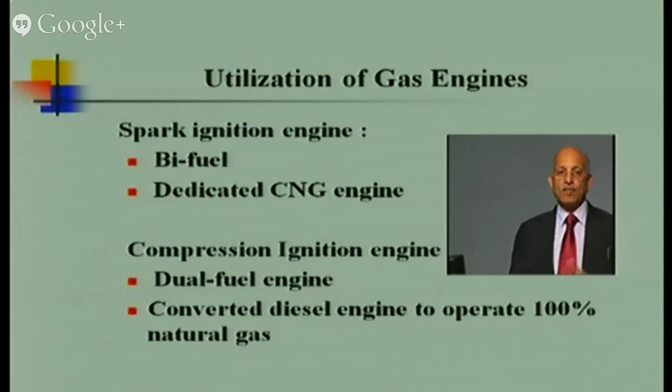A small amount of diesel, say in the 20% or 30% range, acts as a pilot. When this is injected into the combustion chamber, there will be two types of burning: one is called diffusive burning, another is homogeneous burning. In the diesel engine in dual fuel mode, first the diesel will ignite wherever it finds the air, and then that burning will further burn the fuel inside, so in dual fuel you will have diffusive burning as well as homogeneous burning. Next is a converted diesel engine to operate on 100% natural gas.

Any diesel engine, as you know, we have Kirloskar diesel engines, we have Tata and all these engines. They are 4-stroke water cooled or air cooled engines. These can be converted to 100% gas engines. What it means is that once we have a gas mechanism, we have to make certain changes.

The main changes are, first of all, we need a gas carburetor. Like a petrol carburetor gives a 1:14.5 ratio, approximately 15. Similarly, depending on the gas, whether it is natural gas, biogas, or producer gas, every gas has an air fuel ratio. So the gas carburetor will give the air in the correct air fuel ratio. So we need a gas mixing device.

Now, there are certain fuels; you can utilize your gases. You can utilize LPG. LPG is a mixture of propane and butane, and all these gases can be utilized in the dual fuel mode as well as in the 100% mode, in spark ignition as well as compression ignition. Any of it can be used.

Petrol and diesel calorific values are given, and you can see natural gas or biogas have a high ignition temperature, so they cannot burn on their own. Hence they require an ignition mechanism. In the dual fuel mode it will be with diesel injection, or in spark ignition mode it will be with the spark. And these are the air fuel ratios given.

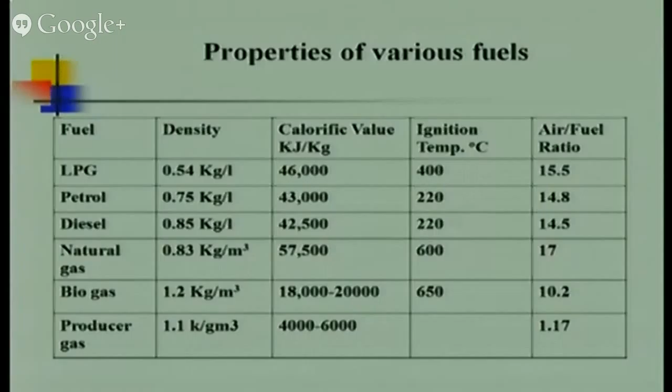These are some compressed natural gas fuel characteristics, where you can see auto ignition. Boiling point is minus 162 degrees centigrade. Air fuel ratio is 17.24, on a weight basis. The volume basis is different and the weight basis is different. Then fuel air mixture quality: it mixes very well.

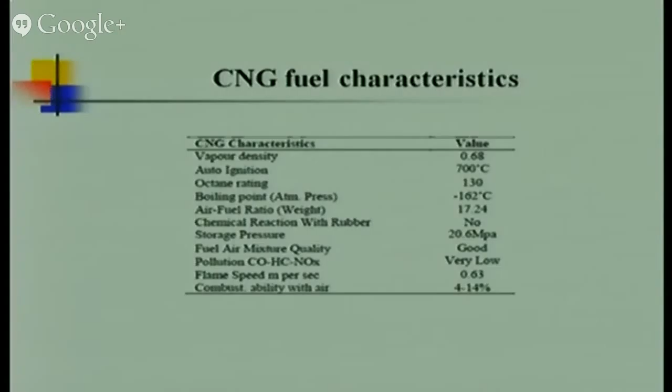Pollution is very less: carbon monoxide, hydrocarbons, NOx. It depends, of course; as you know, NOx is a temperature dependent phenomenon. So we have to see accordingly how the variation of NOx is. And combustion ability with air is very good, between 4 to 14%. If the air is available, it will immediately start burning.

Natural gas is safer than gasoline. How come? Its ignition temperature is higher than gasoline and diesel. It is lighter than air and hence diffuses very fast. LPG does not diffuse very fast. In LPG, it gets stored in pockets. Suppose in the kitchen there is an LPG leak, then it will be stored in the corners, and whenever you start burning, it will burn. But natural gas can diffuse easily into the air.

Diesel and gasoline will pool on the ground, increasing the danger of fire. Once diesel or petrol spills on the ground, it can catch fire and create a problem. CNG or NG doesn't do that. It is non-toxic and will not contaminate groundwater if spilled, while petrol or diesel, whether seaside or otherwise, will do that. It is a cleaner fuel as far as emissions are concerned and an environmentally clean alternative.

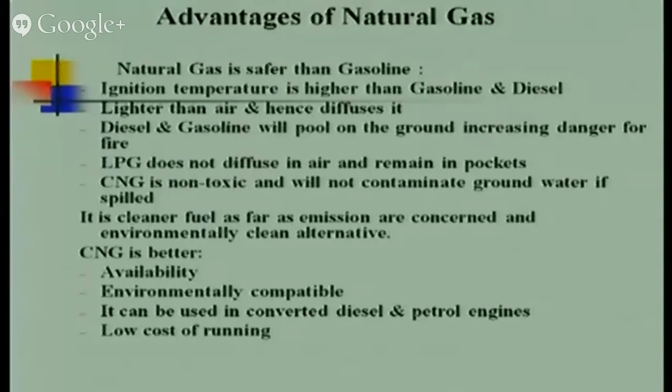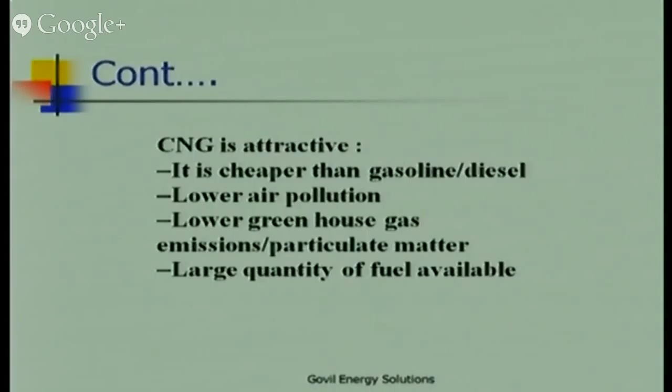Environmental compatibility is there. It can be used in converted diesel and petrol engines, and the cost of running is low. That's why people are getting their vehicles converted to the gaseous mode. It is attractive because it is cheaper than gasoline, low air pollution, lower greenhouse gas, and a large quantity of fuel is available.

But definitely there are certain disadvantages also. The vehicle range: you can fill the cylinders and run to a certain miles. Of course, the same is true with petrol also, but petrol or diesel is available in every state and at all the petrol pumps, which is not the case with natural gas. But soon you will find a day when biogas is purified and converted into bio-CNG and made available. In foreign countries it is there. I hope soon it will be seen in India also.

Fuel storage: because the gas is compressed to 200 bar pressure, you need cylinders for that, which makes the vehicle heavy, and that is a problem. Then infrastructure cost and sufficient supply: as we have petrol pumps, we should have CNG pumps also. In Delhi it is there, or maybe some other places also. So for that you need to make an infrastructure.

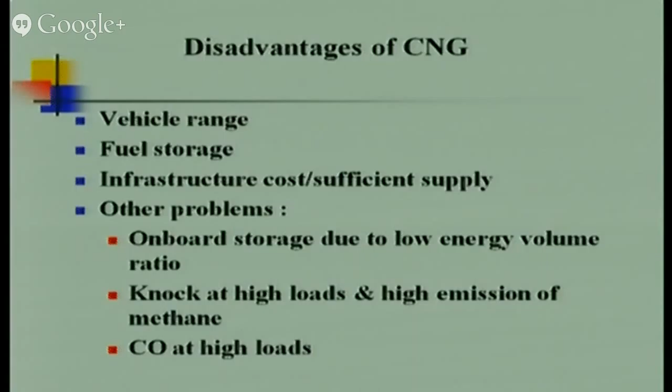Then on-board storage, due to the low energy-to-volume ratio. It knocks at high loads; we have to take care of that knocking. And carbon monoxide at higher load levels in natural gas. So these are certain disadvantages. Otherwise, it's a cleaner fuel, it is a cheaper fuel, it is easily maneuverable. Absolutely no problems.

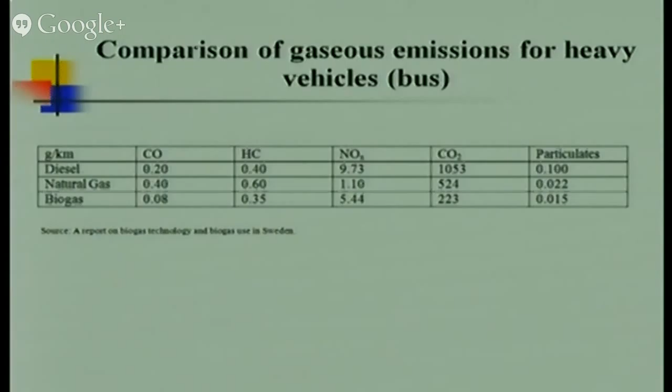This is just a table showing the emission levels. For diesel, you can see carbon monoxide 0.20 grams per kilometer, hydrocarbon 0.4, NOx 9.73, carbon dioxide 1053, and particulate matter 0.10. With natural gas, CO is slightly higher, 0.4, hydrocarbons are there, but the NOx level is lower than diesel. Similarly, carbon dioxide is lower.

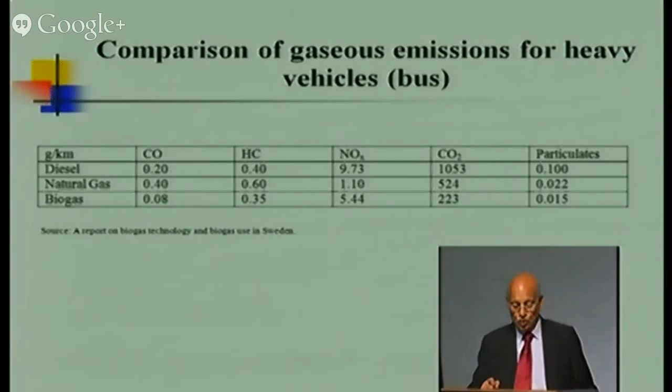Biogas is still lower: CO 0.08, hydrocarbon 0.35, NOx 5.44, carbon dioxide 223. These are some typical figures taken from certain data. They can vary slightly, but not much. It is indicative.

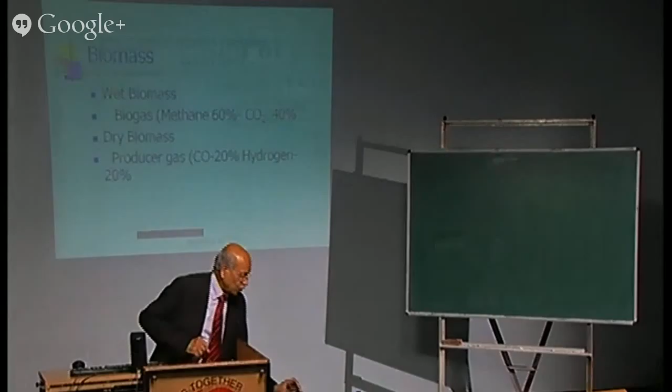Then we have biomass, which could be of two types: wet biomass and dry biomass. From wet biomass we can get biogas, that is methane 60%, carbon dioxide 40%, with hydrogen sulfide and other traces. Any organic material like cow dung, human excreta, food waste, industrial waste can be converted to biogas. The plants, the technique and the technology are there, and that biogas can be purified, compressed, filled into cylinders, and used in the automobile industry as well as stationary applications.

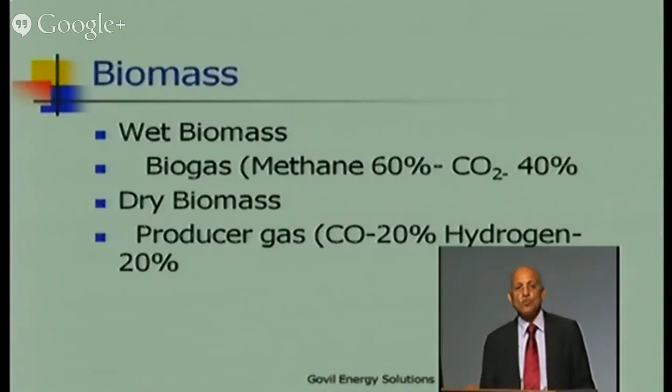For dry biomass, we have gasifiers. We can produce producer gas, which gives carbon monoxide and hydrogen of the order of 20%, 20%. That is possible from wood, coal, sticks and other materials, and all these gases can be utilized for running engines in either of these modes.

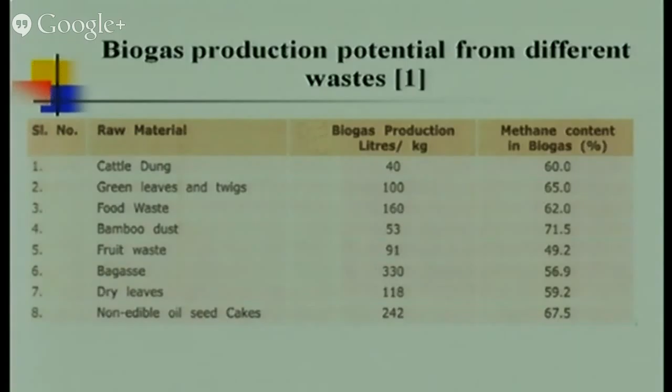It is just a table which will tell you how much waste we are having and how much we can convert. From the cattle dung, I have written 40 liters, which means 25 kg of cow dung. In terms of meter cube, 25 kg of cow dung can give you 1 meter cube of gas in 24 hours, provided you maintain a temperature inside the chamber, best at 38 degrees centigrade, because this is in the thermophilic and mesophilic region. In this case we can convert 25 kg to 1 meter cube of gas.

Similarly, from green waste and food waste, around 12.5 kg to 15 kg can convert to 1 meter cube of gas. Bamboo dust, fruit waste, bagasse (cane sugar waste), dry leaves, non-edible oils, oil seed cakes, and jatropha are also sources. From jatropha we take out biodiesel, and that waste can be utilized for generation of biogas.

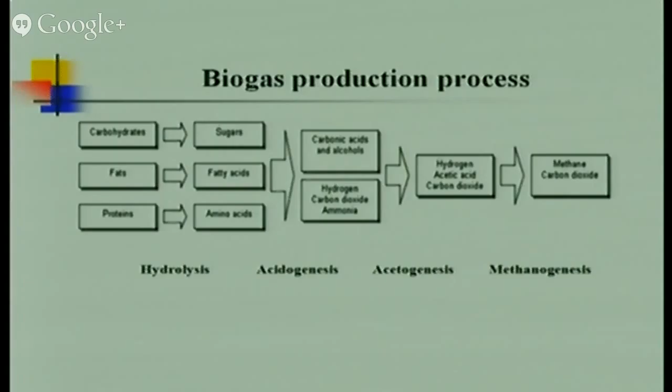This is the biogas production process, where carbohydrates, fats, and proteins undergo a hydrolysis process that converts them to sugars, fatty acids, and amino acids - acidogens. First there is hydrolysis: the raw material is mixed with water. Once mixed, hydrolysis occurs, then acids are formed - carbonic acid, hydrogen, carbon dioxide, and ammonia are formed in the acidogenesis process, and after that is the methanogen process. So these are the four processes by which biogas is produced: first hydrolysis, then acid formation, then acetogenesis, and then methanogenesis.

Now, once we have the biogas, what are the different processes by which it can be purified? First is absorption into liquid, then adsorption on a solid surface, membrane separation, cryogenic separation, and chemical conversion.

The absorption process is the same as when you drink Coca-Cola - once you open it, there's a gas, that's nothing but carbon dioxide, meaning the water gets dissolved with carbon dioxide. In the same way, in this process, water and biogas are used at higher pressure, approximately 10 bar pressure. The gas is compressed to 10 bar pressure, and the water is also pressurized to 10 bar. The gas is passed from the bottom, and water is fed to the top, so there's intermixing in the tower, and you can get purified biogas to the extent of 95%. Methane coming in at 60%, biogas at approximately 55 to 60%, comes out purified at the order of 95%.

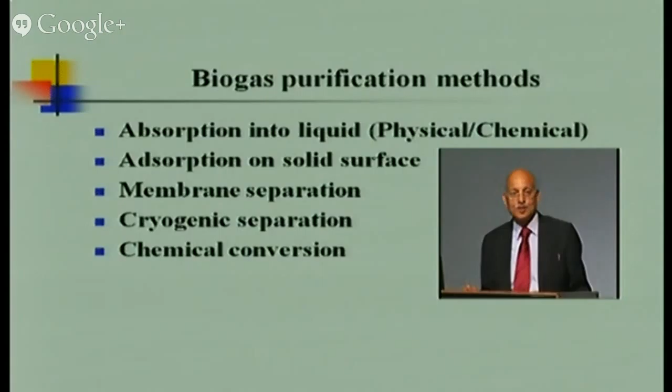The other processes are costly: membrane separation, cryogenic separation, and chemical conversion. They are a bit costly, but membranes are available through which the gas is passed to get it purified. Cryogenic involves reducing the temperature, so you have to apply energy to create a cryogenic system, which makes it costly, and then there's chemical conversion.

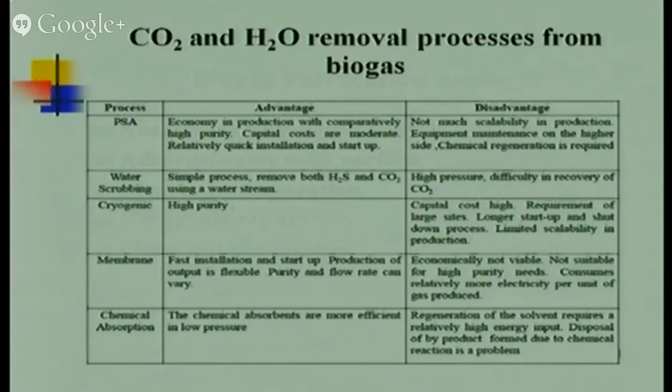This is just in detail. PSA, pressure swing adsorption system, which I just explained to you. It is economical with high purity. Capital costs are moderate, with relatively quick installation and startup.

Not much scalability in production. Equipment maintenance is on the higher side. Chemical regeneration is required. This zeolite, after 5 years of service, is changed. Once that is done, it can be regenerated or it is changed.

Second one is water scrubbing. As I told you, it's a simple process. It removes both hydrogen sulfide and carbon dioxide using a water stream. Water at higher pressure and gas at higher pressure interact, and you get the pure gas. High pressure causes difficulty in recovery of carbon dioxide, because carbon dioxide mixes with water to make carbonic acid.

Either you want to recycle the water, in which case you have to purify it again, which will be a costly affair, or else it is just let to the ground, which will again be a source of pollution. So we have to see it accordingly.

Cryogenics is there, very high purity is there, but capital cost is very high. Requirement of large sites, longer startup and shutdown process. Limited scalability is there.

Membrane also, the rolls are coming from which it is being passed. Fast installation is there, the startup is good, production of output is flexible. Purity and flow rate can vary, but it's not viable, it's really very costly.

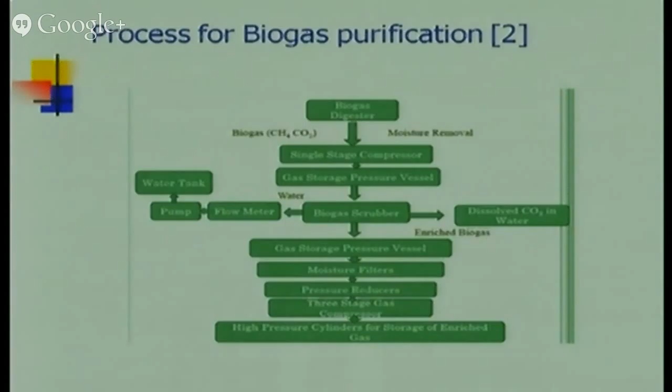Then there's a water tank, we have a pump, then we have a flow meter, and then we are having a biogas scrubber.

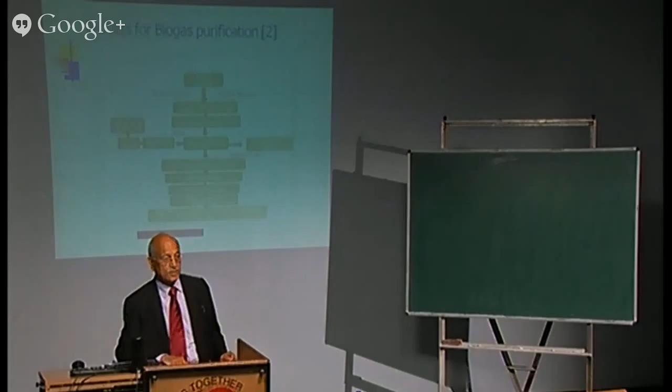Once from the biogas scrubber the dissolved carbon dioxide and water goes out, the gas is stored in the pressure vessel. Then there is a moisture filter, then a pressure reducer, then we have a 3-stage compressor which can increase the pressure to 200 bars, and then it is filled into the gas cylinders, which can be further utilized with your vehicles.

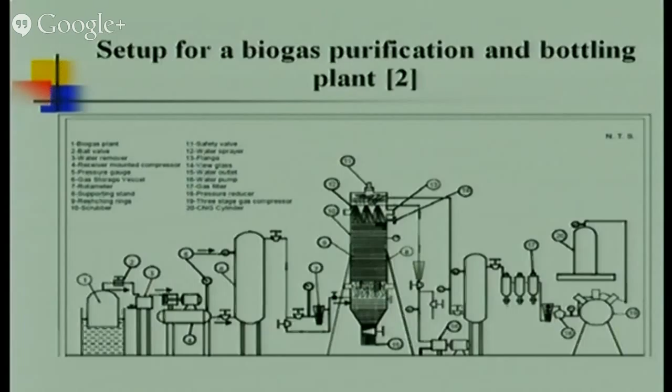...purified, then it is taken to the cylinders. There is a cleaner, the moisture is removed, and on the right side you will find number 19, which is a compressor. This compresses to 200 bar pressure, and then it is filled to the cylinders as required.

You can see the towers as I discussed. The height is more than 4 meters. There is a middle section, a top section, and a bottom section.

The gas is fed from the bottom, water is sprinkled, and we get the gas. We have ceramic materials put in here, which give more interaction with the gases.

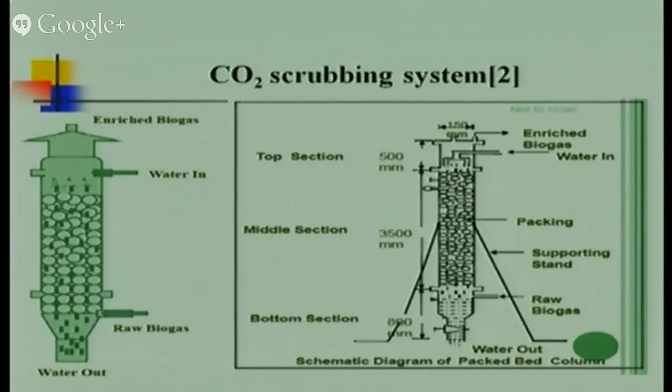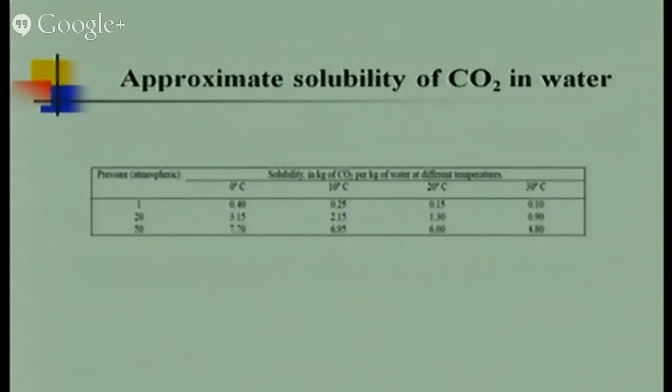Just to tell you, if you increase the pressure of the gas, then there is more dissolution of water and carbon dioxide. More carbon dioxide will be dissolved when you increase the pressure. If you see at pressure 1 bar at 0 degree centigrade, it is 0.40.

But as the temperature increases, the solubility will decrease. So if you increase the pressure, more gas is dissolved, but if you increase the temperature, it is going to decrease.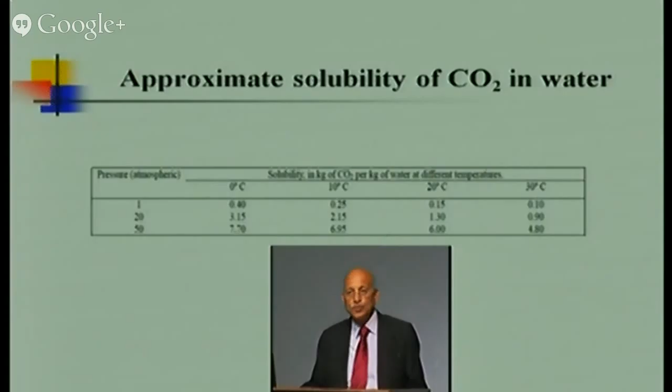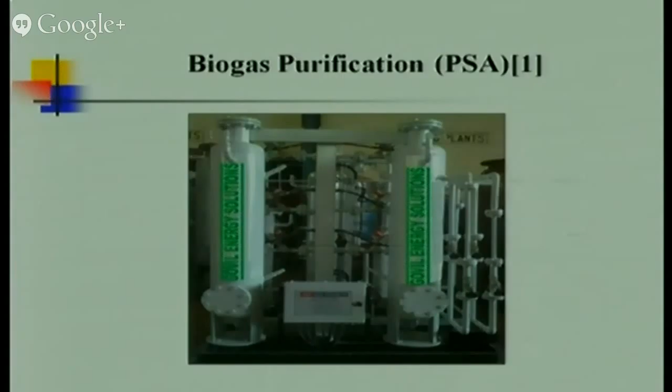This is the PSA system. In this, there are 2 towers. The raw biogas comes into one at a pressure of 7 to 10 bars. Inside the cylinders, there is a zeolite material, zeolite 13, which is an aluminosilicate material having small pores.

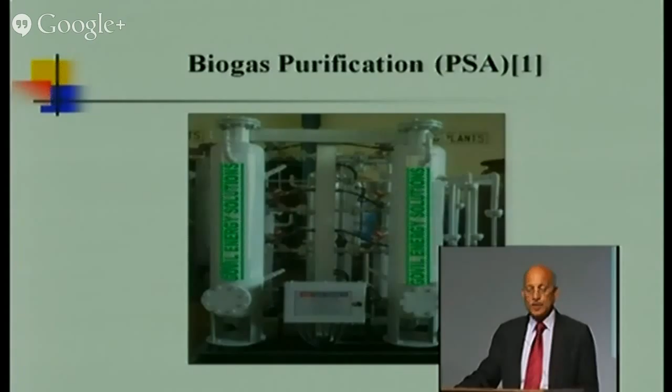The carbon dioxide is absorbed onto the surface, while methane passes from the top. It has an automatic timer mechanism, so one cylinder works for 5 minutes. At that time, methane is let out and carbon dioxide is absorbed onto the zeolite material. After that, in the second cylinder, raw biogas passes, methane is let out, and carbon dioxide is absorbed.

Meanwhile, when methane is being produced and carbon dioxide is being absorbed in one cylinder, the carbon dioxide is being released from the first cylinder. After 5 minutes one cylinder works, then another, then again the first, and so on, and finally you get the methane. One advantage is that you can also store the carbon dioxide.

Once you store this carbon dioxide, you can make it into dry ice. Equipment is available where you can form dry ice, which can be utilized for many purposes. As you know, when we take food onto aircraft, we use dry ice for that. It is a hot cake - it sells like anything.

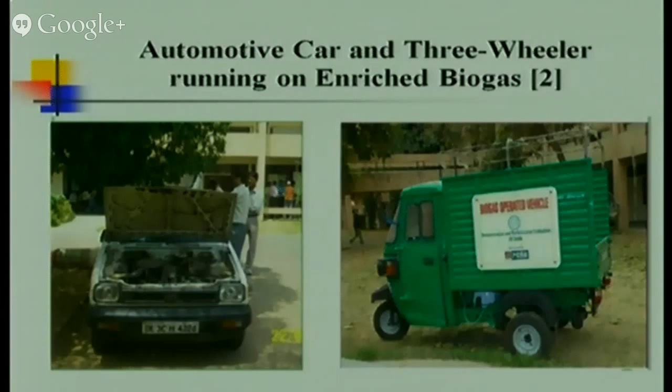At IIT Delhi, in the CRD department, with Dr. V.K. Vijay, they have compressed this and filled it into cylinders, and they are running vehicles there. Also in Delhi, we run CNG buses. So either you can have natural gas from fossil fuels, or biogas converted to CNG used in vehicles - there isn't any real difference, perfectly no problems. The same cylinders are utilized for this.

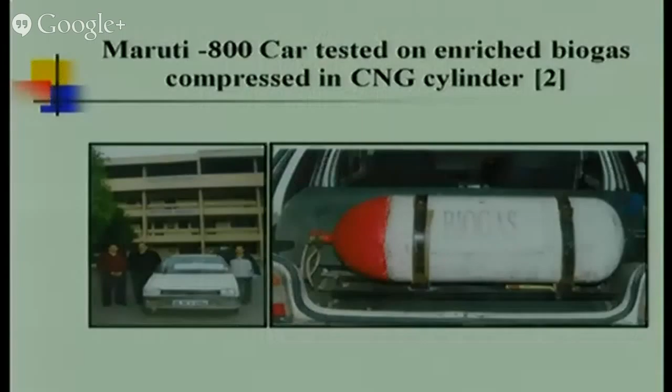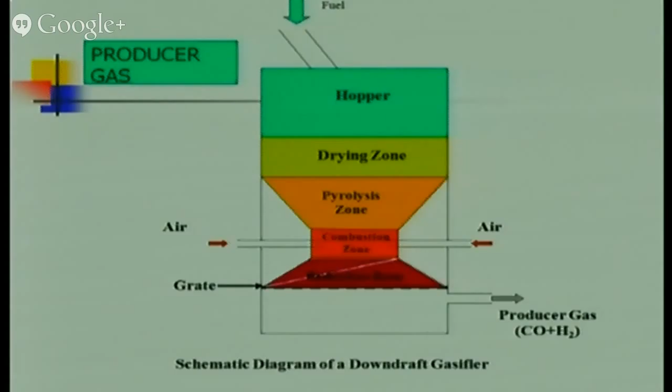This is for the producer gas. This is a downdraft gasifier where there is a hopper, the drying zone, the pyrolysis zone, and the combustion zone. Under controlled combustion, you get producer gas, which has a percentage of carbon monoxide and hydrogen. That can also be utilized either in 100% mode or otherwise.

In the Second World War, there were many vehicles, 80,000 vehicles moving in Sweden, that had this type of mechanism for running on producer gas. But as you know, liquid fuel is easy to carry for longer distances - that's why it is not preferred, for various reasons, but otherwise this can be utilized.

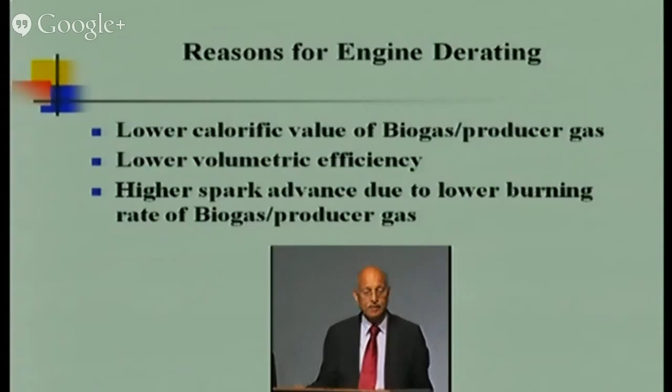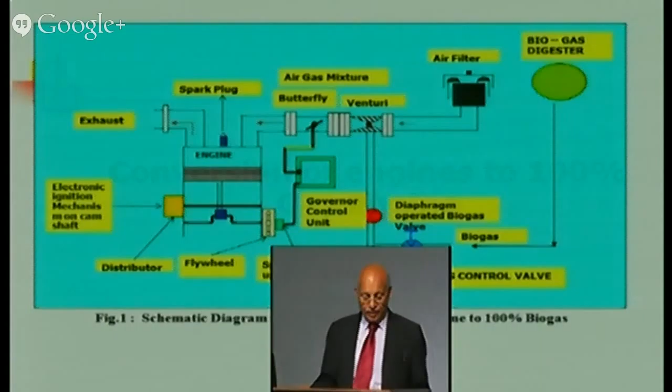This is the diagram where an engine has been converted to a 100% gas engine. It could be biogas, producer gas, or natural gas. What has been done is a diesel engine has been converted - you can see that a spark plug has been put in place of the injector. Sufficient space is available and it can be managed; otherwise, heads are available to adapt them to spark plug mode.

Second is electronic ignition mechanism. So on the engine there is a crankshaft and the camshaft. So where we are putting the pump, the diesel pump, at that place we can put our distributor. Actually, mechanisms are available, it can be put.

Third is gas carburetor. The gas carburetor is a combination of a venturi and a butterfly. So once the air is being sucked in the venturi, the gas pipe is being given, you can see, and once the gas pipe is there, it will give the correct amount. The design of the venturi should be such that it gives the air-fuel ratio in the correct proportion. And then there is a butterfly which will control the charge which is going to the engine.

Now this butterfly is being controlled by the governing mechanism, which in my second half I'll show you, what equipments are available where you can convert a diesel engine or a petrol engine to 100% gas.

In this case, on the flywheel, we put a speed sensor. It will sense the speed. Once you put the load, the speed will reduce. Once the speed reduces, you need more charge. It means the butterfly should open. So there is a governing control mechanism where the speed will be sensed. It will control the butterfly and open the throttle.

When the load is low, the speed will increase. It means the butterfly should be closed, or its opening should be reduced. So immediately it will act on the throttle and control it.

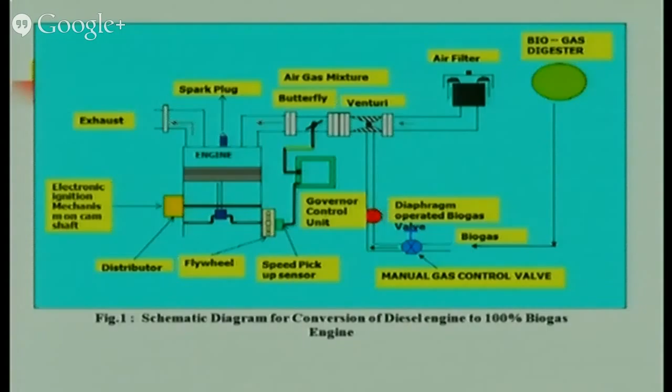Another thing is diaphragm operated valves for the gas to be controlled. The gas is being controlled by a vacuum mechanism. When the air is being sucked in the manifold, there is a low pressure. That low pressure is felt by these diaphragm type valves, which will create a differential of pressures and give you the calculated amount of gas into the system. So this is the whole mechanism of conversion.

As you see in your vehicles also, those who know about the compressed natural gas used in buses, there is a gas kit available. From 200 bar pressure, the gas kit reduces the pressure first to 60 bars, then to 30 bars, then to 6 bars, and then to slightly higher than 1 bar. This is done in the gas control mechanism. The gas is not supplied at 200 bar into the engine. It is supplied at slightly higher than atmospheric condition, or just at atmospheric condition. So there has to be a mechanism, and those are operated in this fashion.

This is a gas injection mechanism. In this, we can feed the gas to the engine in 4 ways. If you see, this is a 6-cylinder engine, where we have a multi-point injection system or single point injection. In the side figure, the first photo is the mixer with carburetion. There is a carburetor, just as I have shown you, with a venturi, and then air and gas mix. So this is the carburetor, the first one.

Second is single point injection, where you give the gas at a single point in the manifold and then it goes to the different cylinders. Then there is multi-point injection. Every cylinder you give the gas. It is not directly injected; that is another step. In the manifold itself, you give it at 4 points or 6 points, but it is still in the manifold, just above the valve. Lastly, you can directly put the gas into the combustion chamber. So these are the 4 ways the gas is fed into the system.

If you see this, there are many ways by which we should run the engine so that there are minimum emissions and maximum power. Compressed natural gas engines should operate at high volumetric efficiency, because as I told you, once the gas is replacing air, volumetric efficiency is decreasing. So if you want to increase the volumetric efficiency, then supercharge or turbocharge.

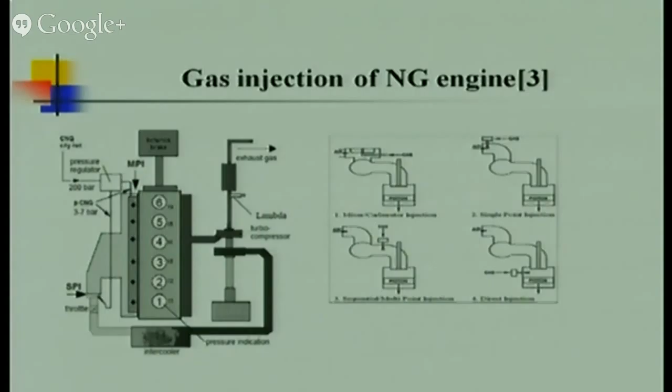If you see the previous figure over here, we are having a turbo compressor. In the turbo compressor, the turbine is being run by the exhaust of the engine, and then there is a compressor which will compress to a higher pressure and send it to the inlet manifold of the engine. So if you want to increase the volumetric efficiency, supercharge or turbocharge, or change the design of the head.

If you want high flame speed, then create a mechanism, either the combustion chamber or a mechanism, so that you have a turbulent effect, or you have to change the combustion chamber geometry. Once you create a turbulent effect in the system, you will have better gas-air mixing. You can have more power out of it.

Higher compression ratio, suitable combustion chamber for higher compression ratio. Reason being, compression ratio is directly related to the power. Diesel engines have higher compression ratio than petrol engines. So if you want a higher compression ratio, you must see that it should not knock, because at higher compression ratio it will start knocking.

Suitable air fuel ratio: we can have lean burn operation, we can have injection type, we can have the turbulent effect. If you are having a lean burn operation, then definitely our ignition mechanism should give higher energy so that it can burn the lean mixture. Low emissions: ultra low emission vehicles are there.

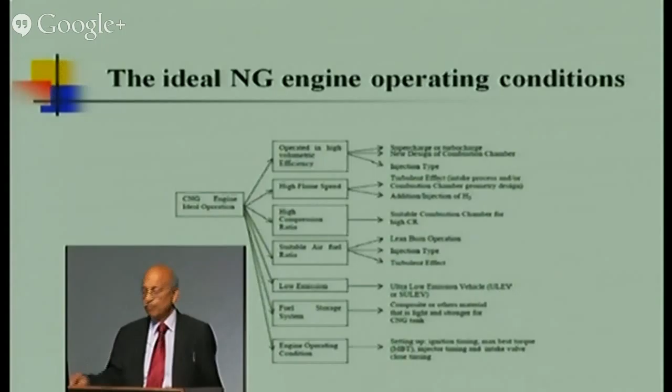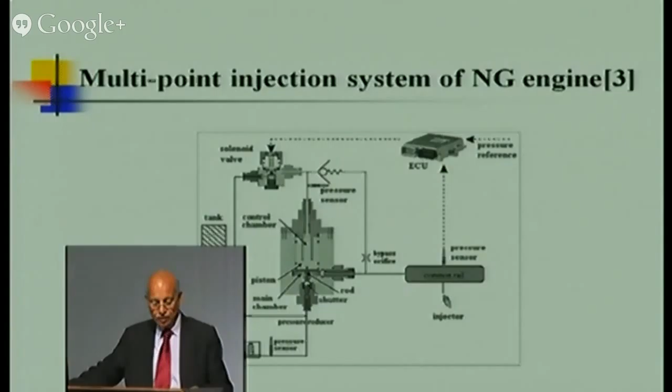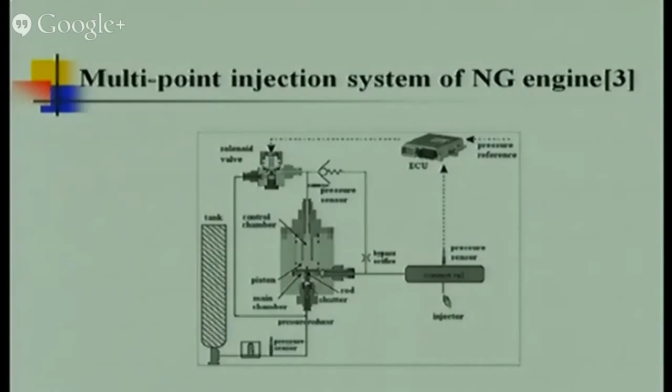This is a multi-point injection system. From the tank, this is a gas control. As I told you, there is a tank over here. With the tank, there is a pressure reducer. 200 bar pressure has to be brought to atmospheric condition, and there are different compartments where it gets reduced. Then, with electronic control or manual control, it is injected into the system.

A comparison was made where a diesel engine was converted to a natural gas engine. What is the data I will show you? The compression ratio was 20.28 in the original one. Then it was changed to 14.5 for natural gas. The diesel engine was run at 20.28 compression ratio, then at 14.5, and the natural gas engine was run at 14.5, and they were compared at different speeds: pressure, temperature, and so on.

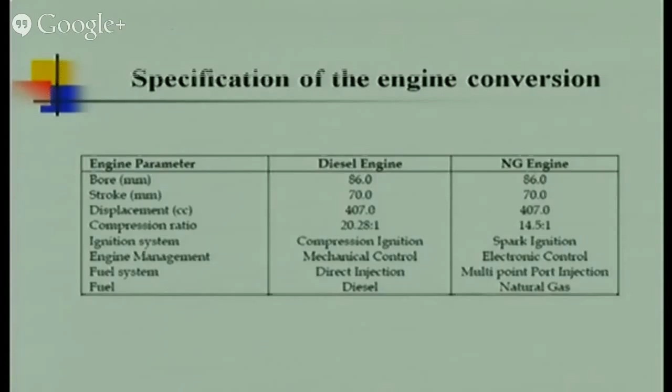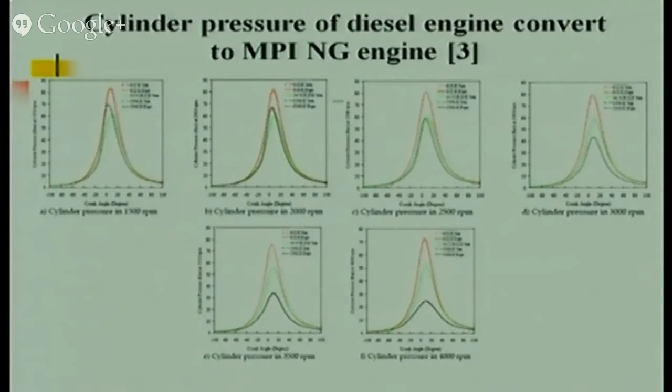So these are the pressure data. If you see 1500 rpm in the first graph, the red is the diesel, the green one is the 14.5 diesel, and the black one is 14.5 natural gas. The comparison has been made from 1500 to 4000 rpm, studying how the engines behave under different rpm conditions. Similarly, the temperatures have also been studied.

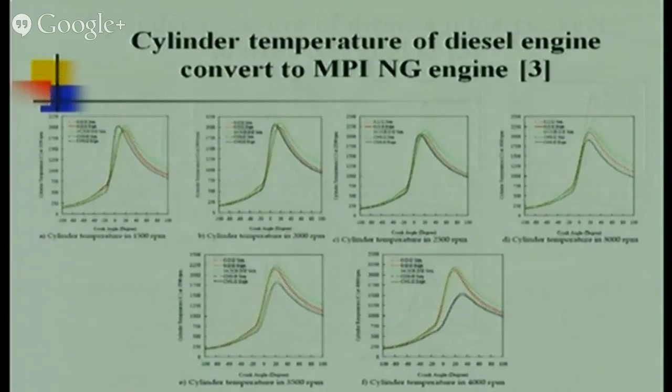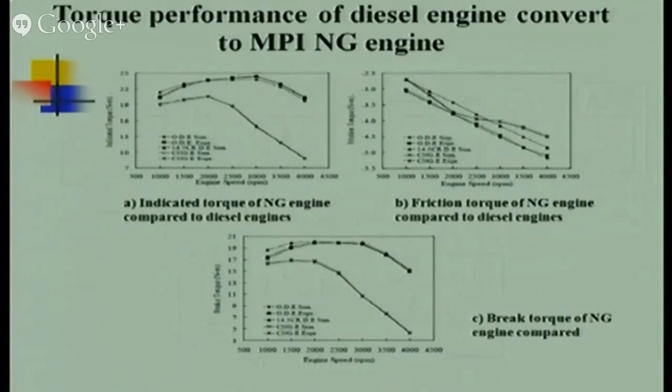Similarly, what is their indicated torque? It has been seen that indicated torque at 2000 rpm was higher in the case of diesel, but in the case of gas it has reduced. The reasons are the same as I told you: there is a volumetric efficiency effect, a calorific value effect, and so on.

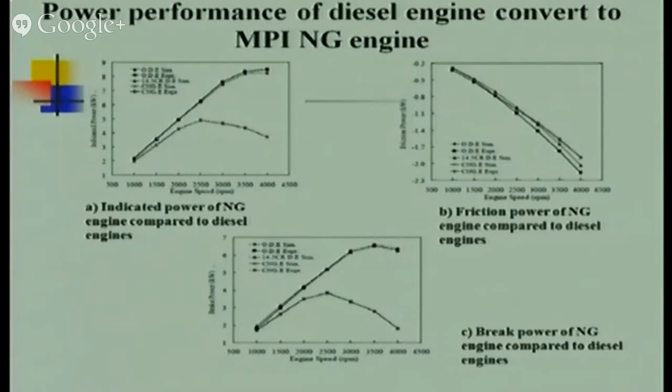Similarly, indicated power variations are there, and ISFC, fuel consumption, is also decreasing here, as can be seen. Indicated mean effective pressure is around 7 to 7.5 bar in the case of the diesel engine, while in the case of gas it is reduced.

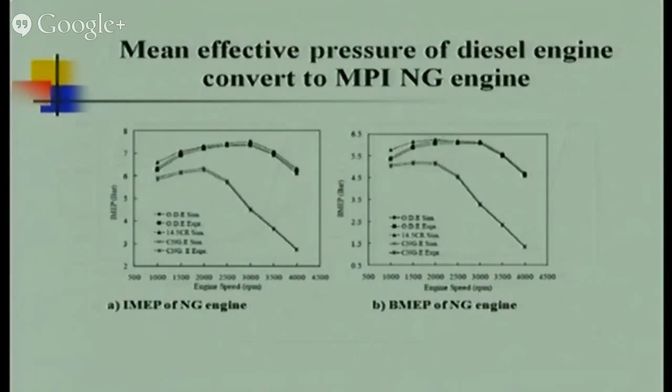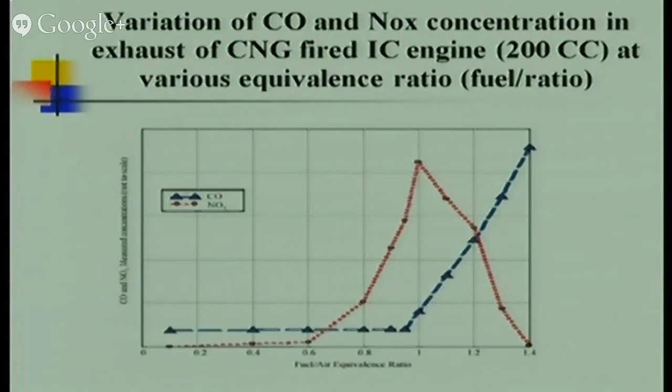Similarly, carbon monoxide and NOx. At a fuel/air equivalence ratio of one, we can see that the CO is almost not there, but after that it increases, while NOx increases and then further on decreases. This was for 100% natural gas.

Now I will tell you how this biogas or producer gas or natural gas is utilized in the dual fuel mode. As I told you, dual means air plus gas is sucked in, air plus gas is compressed, then pilot fuel is injected, and then there is power, and then exhaust.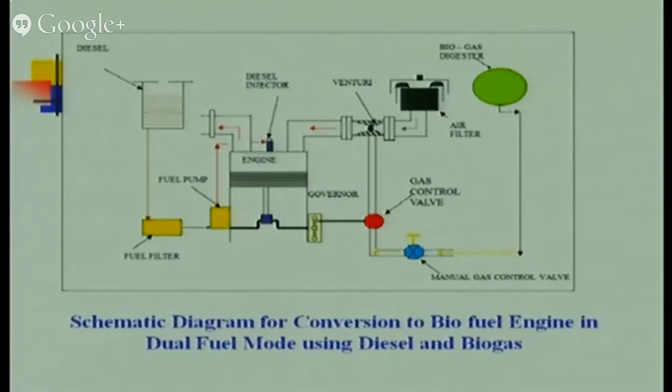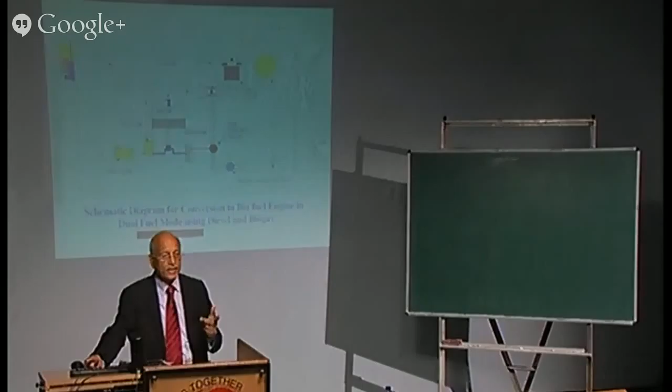The diesel is injected, and the injector remains the same. So not many changes are required, only you have to put a designed gas carburetor, and that gas carburetor should be controlled, governing should be there, which I will show you in my next slides. We are doing mechanical governing as well as electronic governing for that.

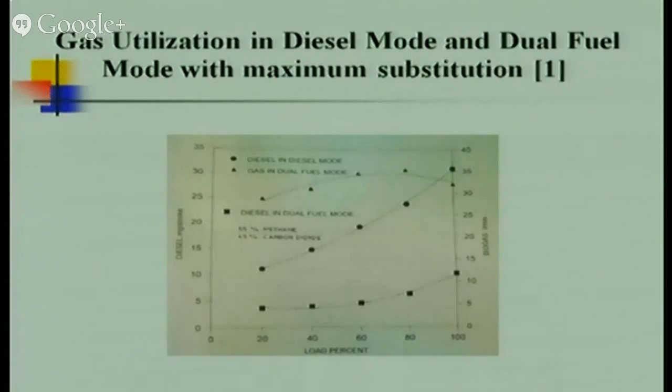There are certain graphs taken at different load percentages for the diesel and the gas. As you see, the black dots are there, where the diesel is increasing as the load is increasing, but in the dual fuel mode the gas portion is there. So there is a utilization of around 70% gas and 30% diesel.

One of the main problems is that we are not changing the injector, we are using the same injector, and if we make a larger percentage of gas, say 80%, 85%, 90%, the injector will become hot. Because the injector is supplying the diesel, and the diesel is cooling the injector also. So we have to take care that we cannot substitute to a higher degree, else there will be a problem with coking at the tip of the injector. The holes may be closed, like that.

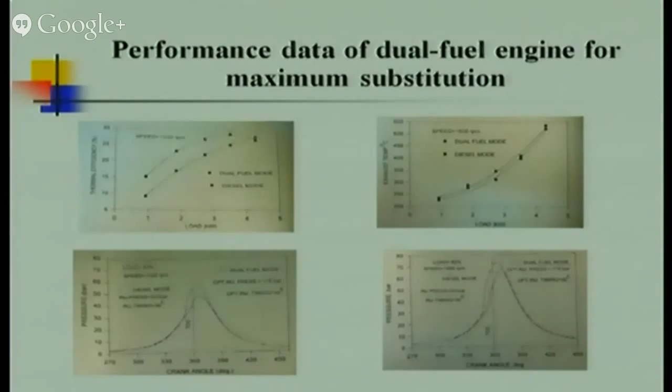Similarly, we can see the thermal efficiency. Thermal efficiency is lower vis-a-vis the diesel engine, but at higher load it is comparable. Similarly, the pressures at 20% load and 80% load are the readings we have taken. At 20% load, the whole gas will not be burnt. Biogas is a slow burning gas. A lot of the gas will pass through the exhaust, and that's what we call late burning. The mixture is prepared but not burning, it will burn in the exhaust. So exhaust temperatures are higher in gaseous fuel engines vis-a-vis liquid fuel engines.